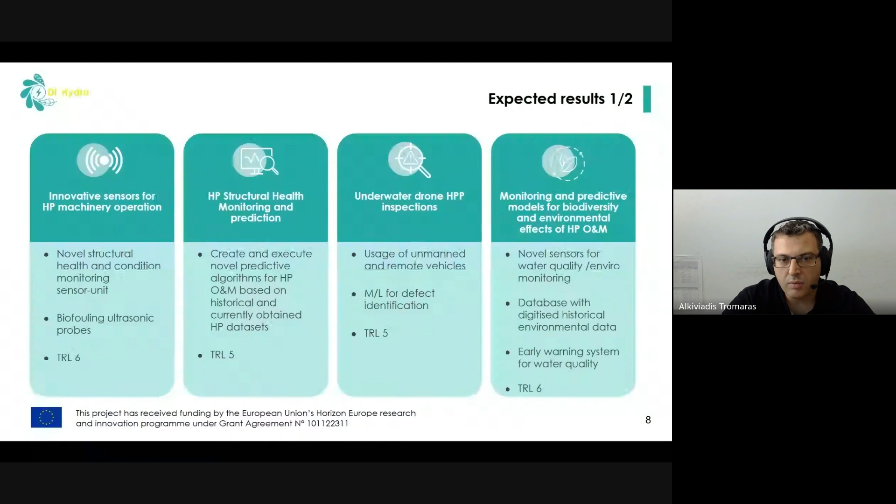Okay, so another of the main tools that we are developing is forecast modeling, and this is about developing AI-based algorithms that can create short-term and long-term forecasts about water inflow for a specific use case that I will talk about in a few minutes. We're also developing digital twin tools, digital twins of specific plants and generic digital twins. There is also a decision-making platform being developed that Pietro from Mass Consulting will discuss in detail. And finally, we also have advanced encryption algorithms for all the data collected from the plants, the sensors and the digital solutions that we are developing.

There are three distinct use cases in our project. The first use case is with PPC in Greece, and it involves 3 power plants. It's more about installing the sensors for structural health monitoring, getting data, and monitoring certain machinery in order to make predictions about potential failure. There are also algorithms being developed for that.

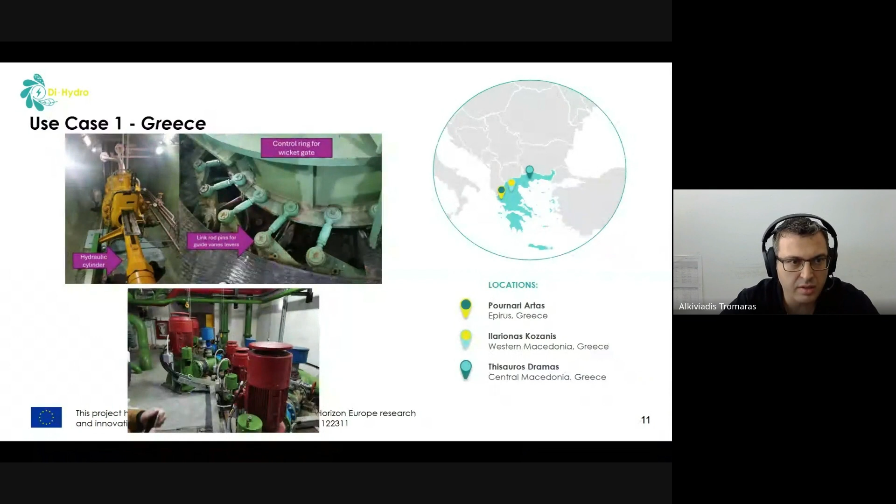The second use case is in Italy, with A2A participating in that, and WaterJade. Here it is more about creating a digital twin of the whole water cycle of the catchment area between two lakes, the Sauris and Verzegnis Lake, collecting historical data, installing flow meter sensors, and creating AI-based modeling and forecasting for short-term forecasts within like 5 days, and long-term forecasts within 6 months.

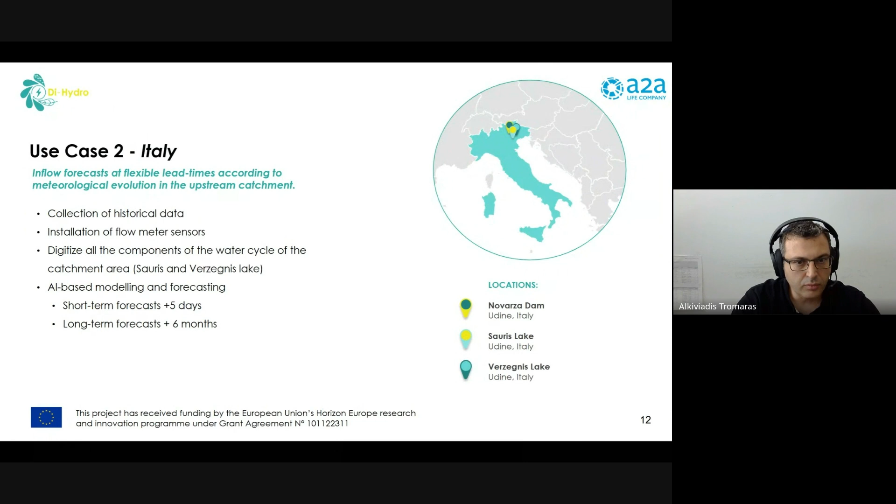The last use case is in Serbia. It is about collecting historical data from environmental monitoring, and also developing and testing the biodiversity and environmental monitoring sensors in the field, and collecting more data in order to be able to model environmental parameters and biodiversity parameters, and being able to make a correlation between environmental parameters and maintenance, when basically a power plant can go into maintenance, depending on the monitoring data that we collect.

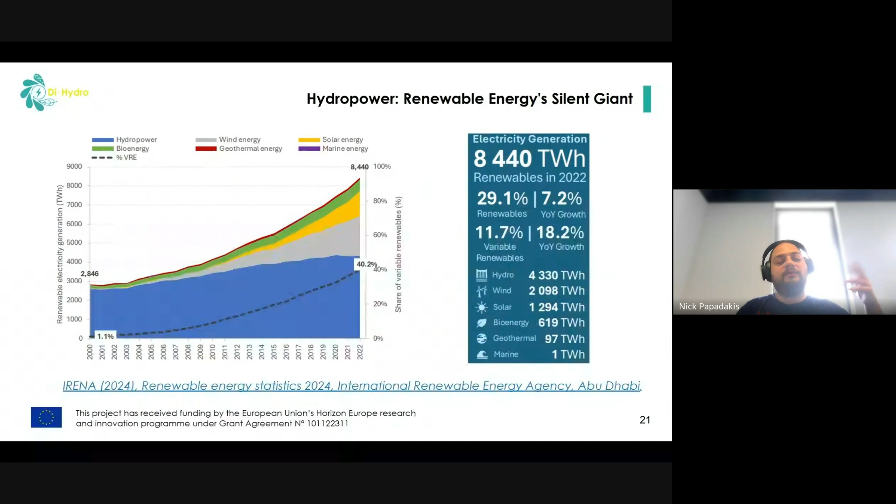But the difference, of course, is that as years pass, we have a shift towards what we call smart hydropower. Smart hydropower is taking the traditional standard power plants and adding new technologies like Internet of Things devices, AI, machine learning technologies, data analytics. Why? Because it allows us to do many things. For example, as Alki said, in the use cases that we have in the project, we have real-time monitoring and automation. We can have predictive maintenance. We can have ways to reduce the environmental impact by checking what is in the power plant and the surrounding waters and so on.

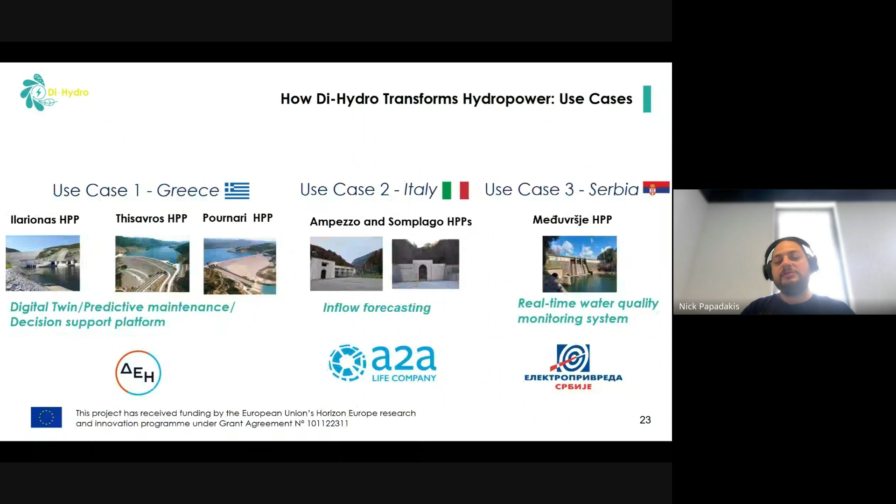And more specific for hydro, I'm not going to say them again because you already saw them. We have predictive maintenance, digital twins to allow for decision support systems. We have forecasting. We have the real-time water quality monitoring system. But what is common in all the cases is that all of these are powered by data.

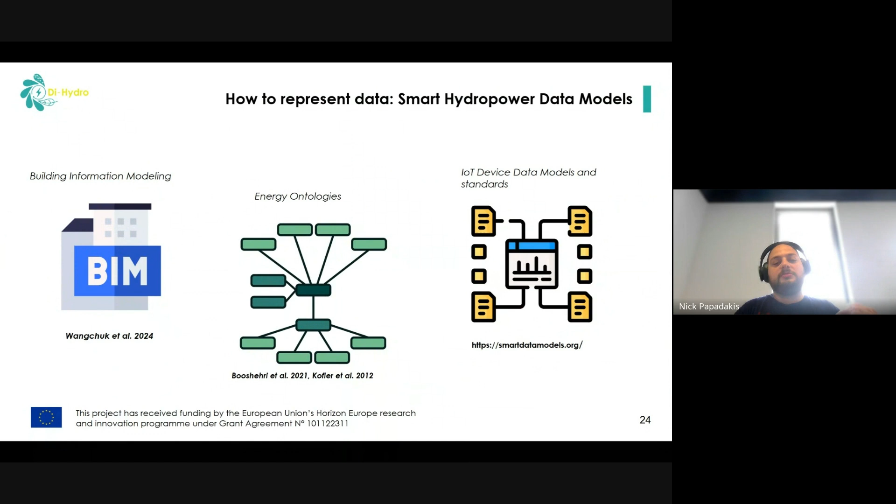Now, there are many different ways that someone can represent data and digitalize information. For example, for the buildings themselves, there are many building information modeling techniques. There exist energy ontologies that are used to represent information even for hydropower plants. And of course, there are ways to represent the devices, their measurements, and so on.

But the main problem with what already exists is that it is mainly more generic towards the energy sector. This means that it lacks a lot of concepts that we need, especially for hydropower plant components and applications, and I'm going to go into detail further on. We do not have, as we have for example for smart vehicles with GTFS, a standardized way to represent information that would cover everything: the applications, the static data, dynamic data, and so on.

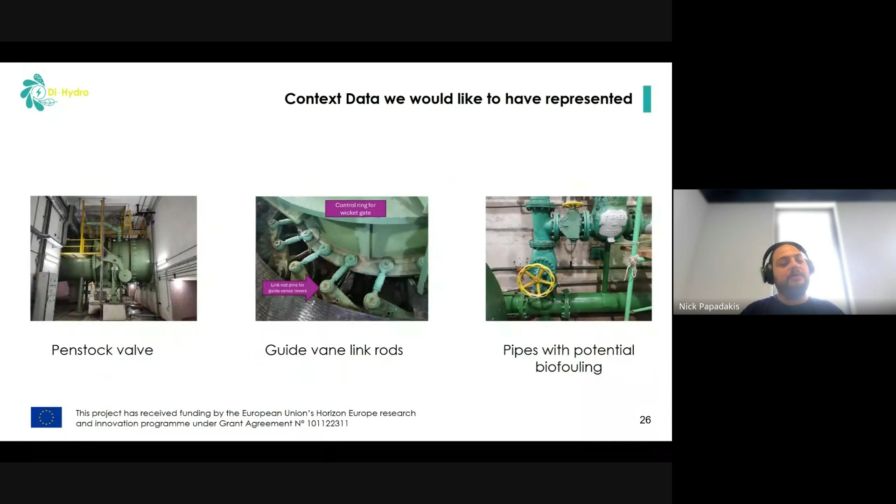So let's examine first what kind of data we're talking about. To enable applications such as the ones we saw in the use cases, and to enable smart hydropower plants in general, we want to have context information. What I mean by context data here is that we want to be able to represent the various components of the hydropower plant, as well as specific details about them. For example, there exists a valve in the hydropower plant. It has this specification, has these sensors placed on top of it, and so on.

And why is it very important to have details about the context of the data? Let's say that someone has a small-scale hydropower plant. They call it small-scale. And there is another company, another organization, that has trained an AI model on what they call small-scale hydropower plants. They say, okay, perfect, we can use it, we have a similar plant.

But there exists in the real world what we call context ambiguity. This means that the same thing, based on context, might mean different things between organizations. So if you do not have a standardized way to explain and represent information, there might be misunderstandings, problems in connecting organizations, and so on. We can see that small-scale hydro means a different thing for Brazil, for China, for the European Union, and so on.

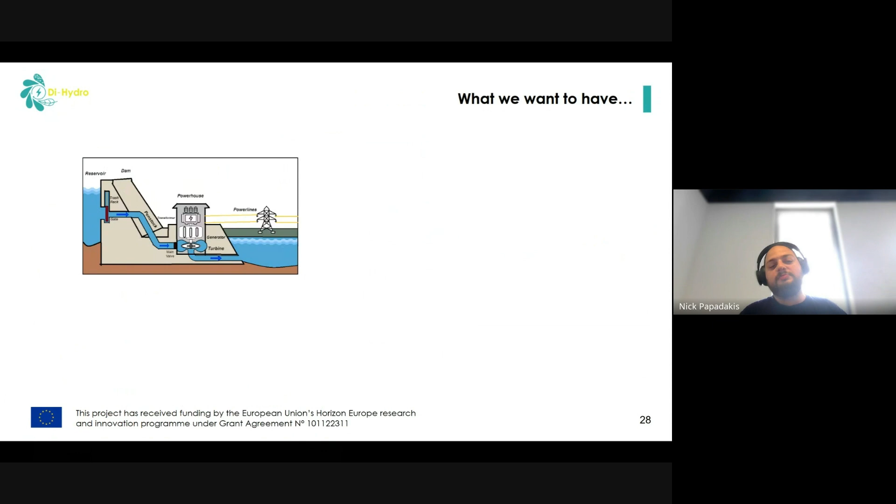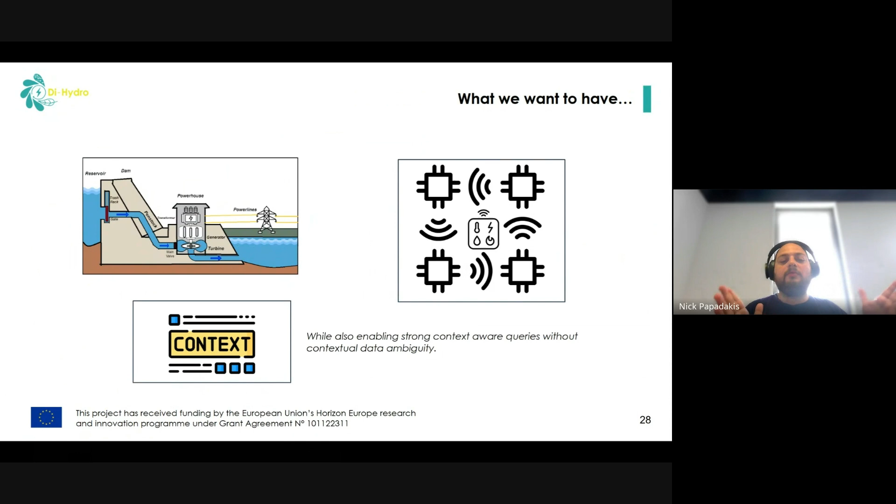So what we want to have here in the project is to be able to represent static information, meaning the components of the hydropower plant and the various sensors that we're using in the project, in a way that enables strong queries over the data, without this sort of data ambiguity. And how are we going to do this? Through our own defined smart data models. What we do here is try to follow a European standardized approach in data modeling, more specifically NGSI-LD, which means Next Generation Service Interfaces for Linked Data.

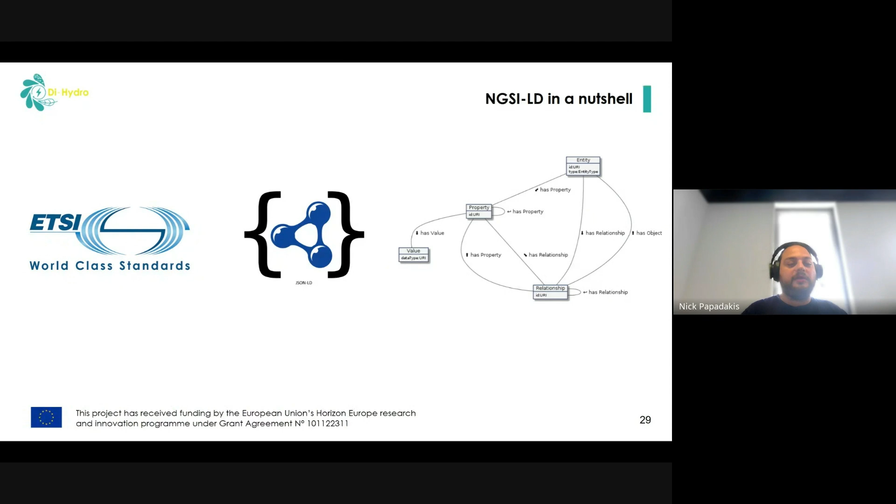That is basically JSON, for those that know, with also linked data, with also semantics, a way to have both property graphs and RDF in the same place. I'm not going to go into detail, but we try to follow a European standard for our data modeling.

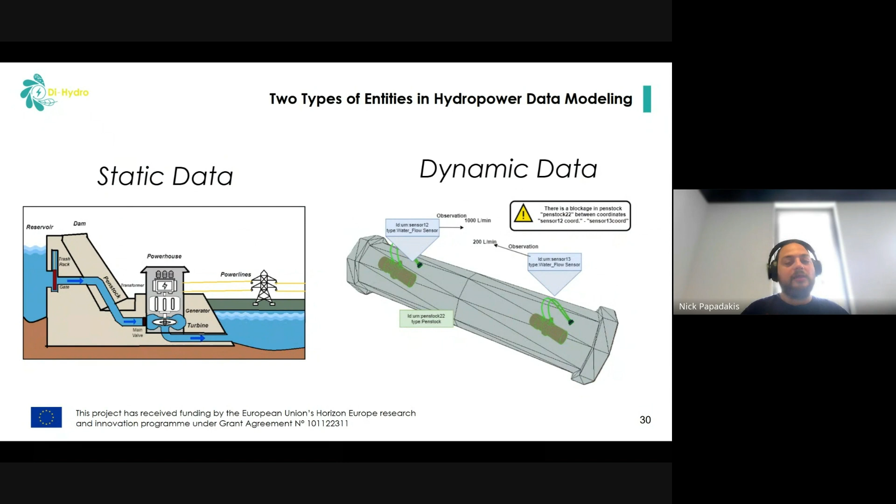And what this means for us is that we could have a way to define both static data and dynamic data. With static data, we mean the various components of the hydropower plant, like the dam, the reservoir, the powerhouse, the lines, everything that does not usually change over time, mostly structural details, components that change after many years.

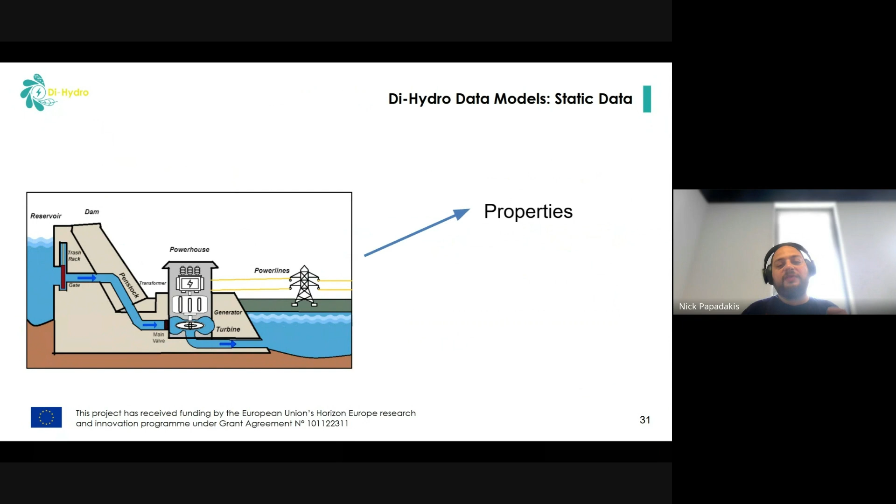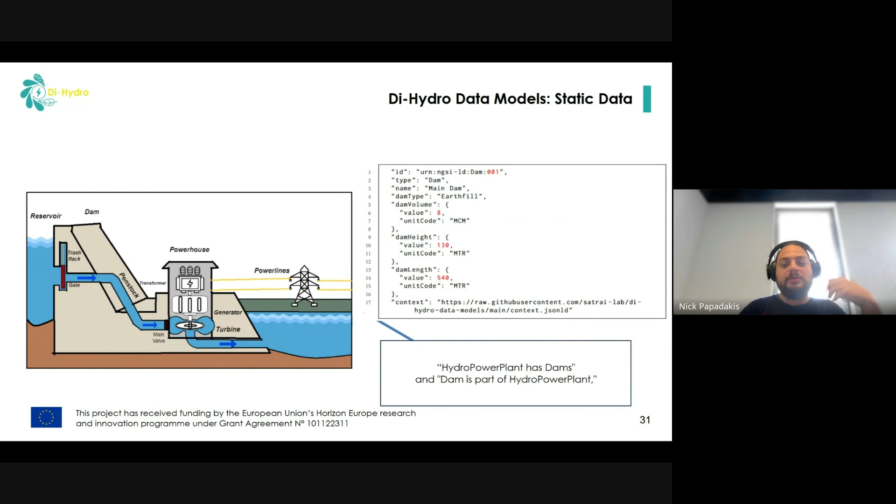And we have here two things: properties, which are very specific details about the components, and relationships. Relationships are, as the word says, the relationships between the components. For example, this specific hydropower plant has this dam. This dam is part of the hydropower plant. And these are very useful because through this, we can do strong queries for our applications.

We do not only represent structural details, but we also represent information about sensors and what they produce, what we call observations. And we have very specific details about the sensors, like where they are placed. So we can enable applications like, if we see that a measurement is different between one placement and another, we can see that there is perhaps a blockage in a specific pipe.

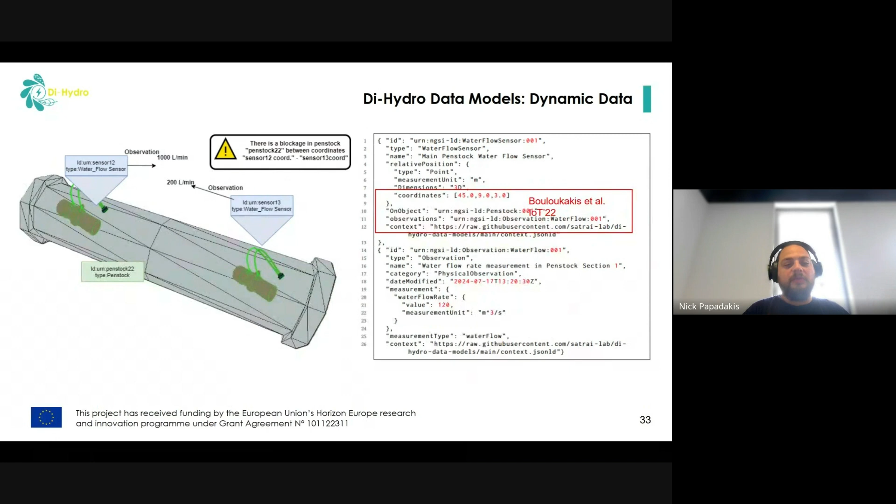And this is based on work that we have published and extended. In this work, we have done what we call a separation between the modeling of the sensor itself and its observation. Why do we do this? Let's say we have a temperature sensor that observes 25 degrees, and an application uses this observation to display something, but this sensor breaks down and we replace it with another sensor. If we have this decoupling between the sensor and observation, we can do these kinds of maintenance changes without changing our underlying applications.

And in Di-Hydro, all this data that we have modeled, while I'm not going to go into detail here, maybe in another webinar in the future, flows through what we call a federated design. Federation here means that each hydropower plant has control over their data, their modeling, and the flow of the data, and they can selectively share what information they want, maybe only about specific sensors or specific components. It's up to them, because of course, a lot of data is confidential.

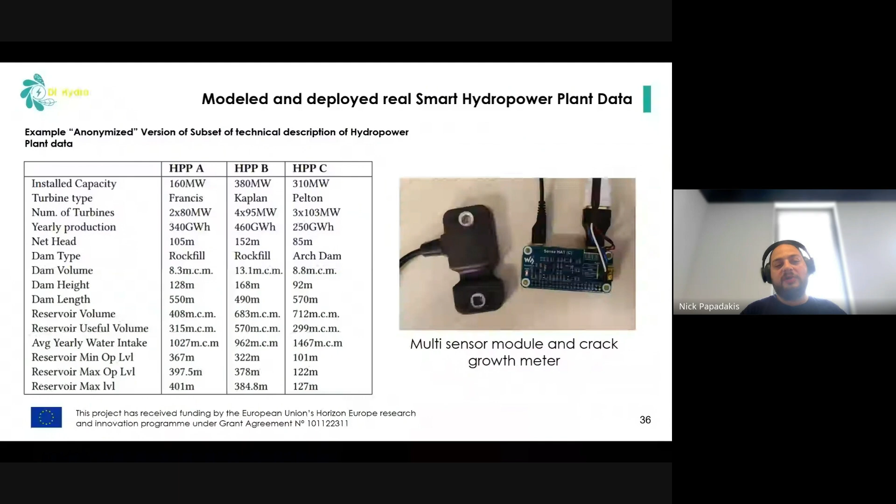And finally, we have done this in our project on real hydropower plant data. We have created models and converted them into our format. This includes both static information, here a fake anonymized version of our data, of course, and real devices that we deploy for the project. And this kind of modeling allows us to do a lot of queries that are important for our applications right now, but also for the future.

And we are continuously refining our models based on the feedback that we receive from partners. The models themselves, not the data, we make available as open source. And we hope that in the future, it will become part of the community as a whole.

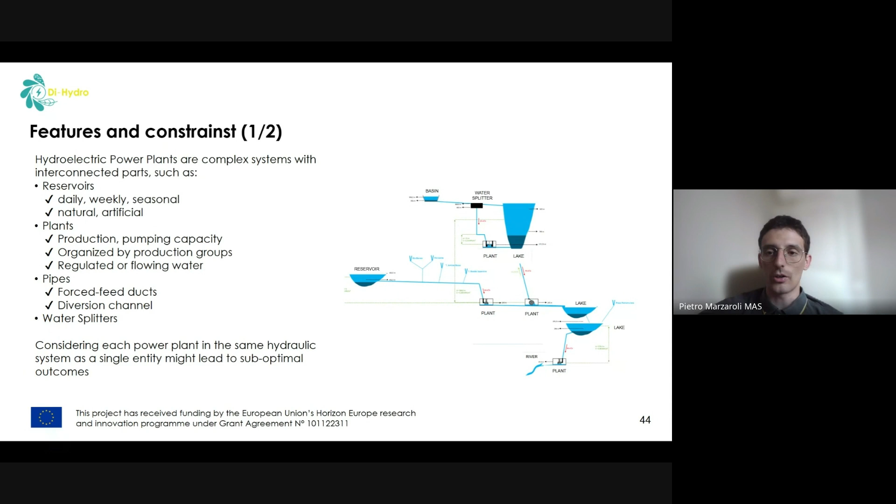We have different data regarding the reservoirs, which can be daily, weekly, or seasonal. We have data regarding our power plants, so we know their max and minimum production. Some can pump water from one basin to the other. And we have data regarding the water pipes that connect one part of the system to the other. For example, water discharged from one part of the system can become available in the next part only a few hours later.

Finally, we have features and constraints on our power plants and our reservoirs, and we have regulations on these parts. For example, the system cannot be emptied or filled at a higher or lower velocity than a limit: the water level cannot rise or decrease more than 10 centimeters a day or 10 centimeters in an hour, for geological constraints.

We have constraints of the machine. So, for example, often we see that the machine cannot be started or stopped more than twice a day to reduce the stress. We have a minimum and maximum capacity, or minimum and maximum power at which the machine can run efficiently.

And we have also regulations on, for example, the reservoir: for touristic constraints, the reservoir cannot be empty at a given period of the year, to have, for example, an increased tourist experience.

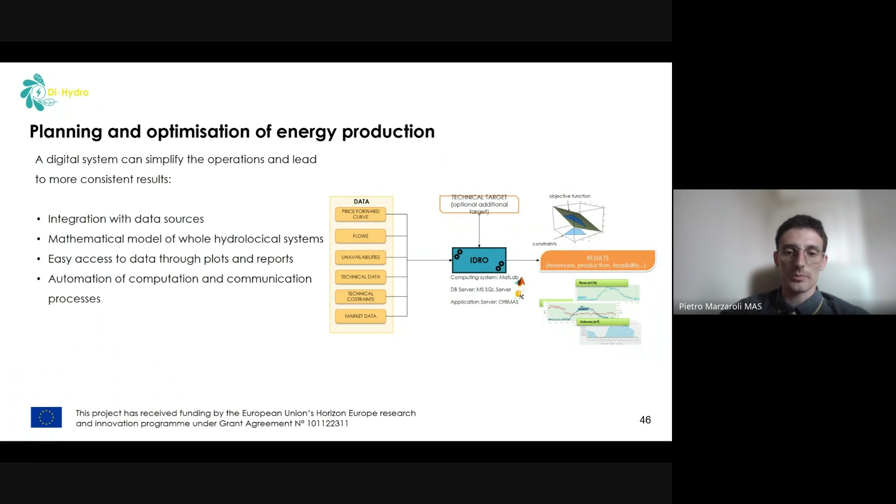Also, a digital system can allow an automatic process of data import, computation, and transmission of output, so the load on each person can be minimized or made more effective. This system can be used in different ways. So creating these systems that contain this different kind of data, that are able to deal with this kind of data and able to create output autonomously, can be leveraged for different goals, for different applications.

One is planning. So I have the forecast of inflows, the forecast of prices. I can plan my production on the power plants in the same hydrological system, for example, to put the optimal production on the market.

Another way, it is possible to do what-if analysis. So instead of having, for example, one single forecast of inflows or prices, I can have different forecasts of inflows and prices and test how my production changes in accordance with different forecasts. So I can test, for example, if my system is robust to minimal changes in the input. Similar is stochastic analysis. So I can estimate the variance in output according to the variance in the inputs. And also, again, variance analysis.

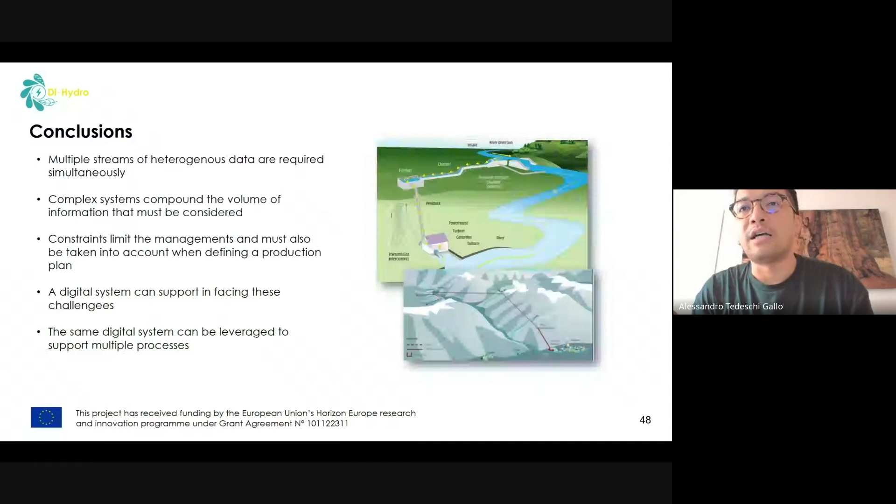On the chat: for the optimization, do you plan to use legacy tools such as stochastic dynamic programming or mixed integer linear methods? Yes, we used an optimization that is at its core a mixed integer linear method. And another follow-up question, again from Janice, is: will there be development of new methodologies? For the optimization itself, at its core it is a mixed integer linear method.

Now I'm talking by experience. At MAS Consulting, we are always experimenting with different methods. But so far, mixed integer linear is the one that gave us the best results, mainly in terms of reliability of the output. So there may be other methods, but one of the requirements we often have is that the system must work and must provide results in a wide variety of conditions.

The main core of the R&D is mixed integer linear programming, which is a legacy method, but to apply it effectively at different power plants it must be tuned, and to have an effective and optimal solution it must be tuned and studied for the different power plants.

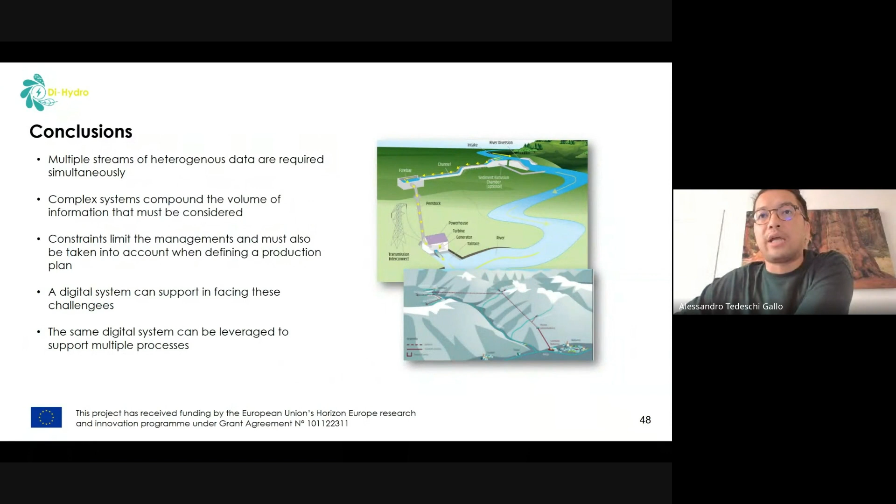Thank you so much for your presentation. I have a question regarding the gross head. Did you include the gross head data of the reservoir in your case study, and do you think the gross head will affect the optimal energy production or not? Yes, that is one other aspect.

If we include the head, the water head on the turbine changes with production, because obviously the more I produce, the less water I have, so the lower the head, the less efficient the whole system. This part, also circling back to the previous question, is not linear, so it cannot be dealt with by a simple MILP, mixed integer linear programming, system, but with more complex systems, or with multiple steps of optimization, this effect can also be taken into account.